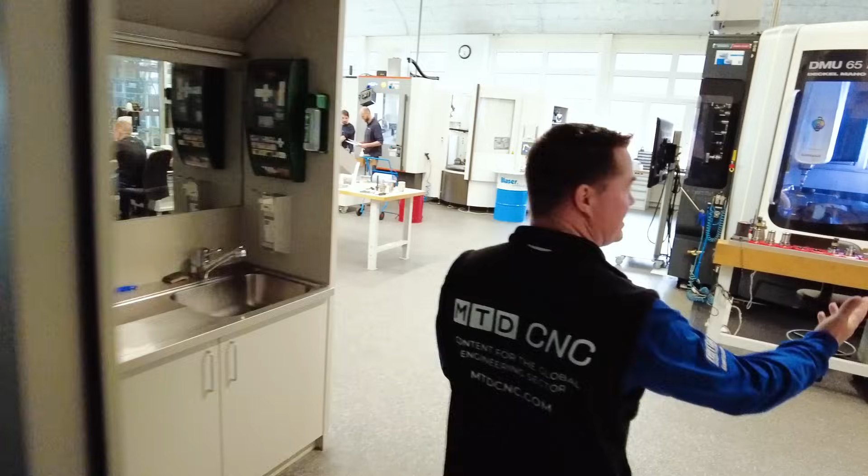And yes, we are here in Switzerland. As I've already mentioned, we see people doing R&D here. Adrian's speaking with one of his colleagues. In fact, this is the social media area.

Adrian, thank you so much for allowing us to have cameras. Nice to have you here. Oh my gosh, this is one of those, I actually literally have chill bumps right now. It's not every day we get to see and show the audience, the world, the inside of something of this magnitude and this significance. As a global leader in coolant, you guys go above and beyond to make sure your customers are taken care of. Absolutely. Thank you for having us here.

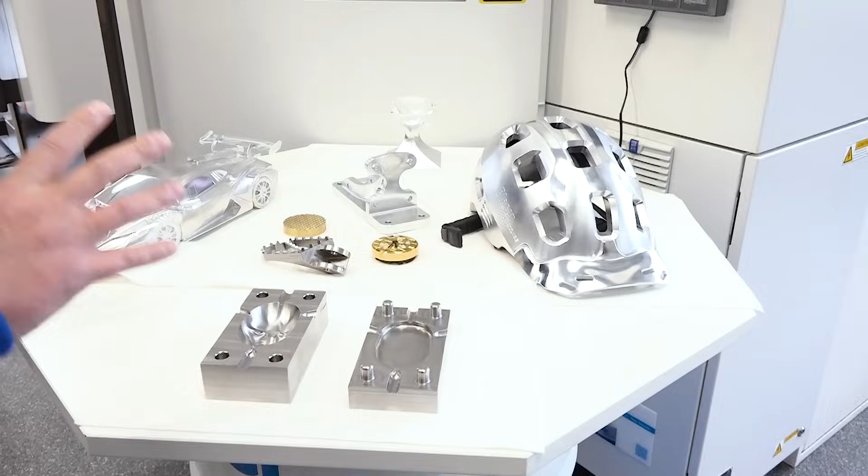Perhaps I can show you some social media parts. Well, the audience and I both love seeing really sexy manufacturing parts, and that is what you have done right here. It's a little heavy on my head, but to be fair, it started out as a really heavy block, didn't it? Absolutely. There are about 30 pounds of aluminum, which our dedicated machinist milled on the machine. So we are happy to have such an experienced guy here in the tech center, and it's always interesting projects to perform here.

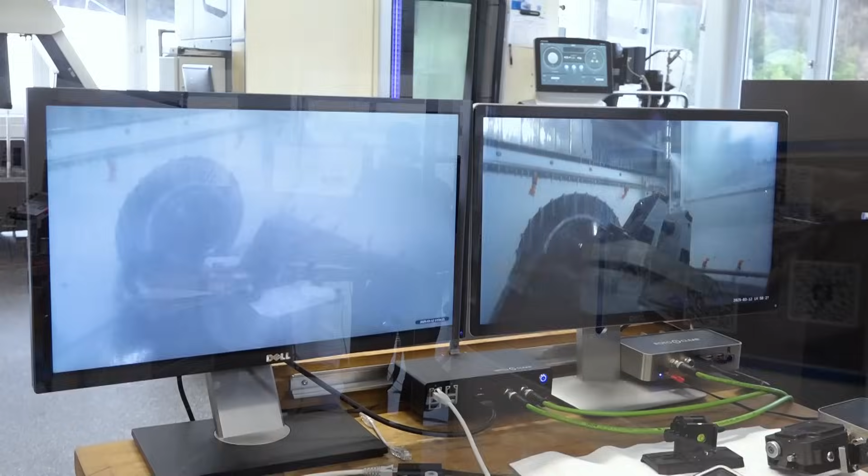Adrian, the world of manufacturing, well, let's just start with the world at first, understands how significant and important marketing is, but the world of manufacturing hasn't 100% caught on to that yet. You guys have. You have a dedicated work cell right here, I see QR codes you can scan immediately. You have a young man that's been doing this a long time, and I even see partners throughout here that believe in manufacturing and marketing as well. What does marketing mean to Blaser?

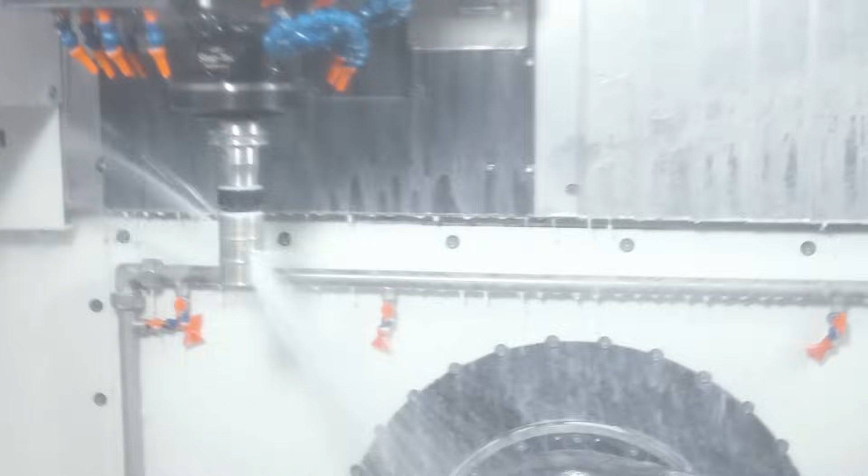I think marketing means to Blaser that we can bring the coolant near to the customers. And it's so important to bring this knowledge to our next generation, because they don't read a lot of papers, they have their phones, they want to see videos. That's the reason Blaser put so much effort into this project.

Well, you're doing an amazing job, and I 100% agree with you. Quality speaks for itself, that's the foundation. Then we've got to get that noise out there, right, and let people know what's going on.

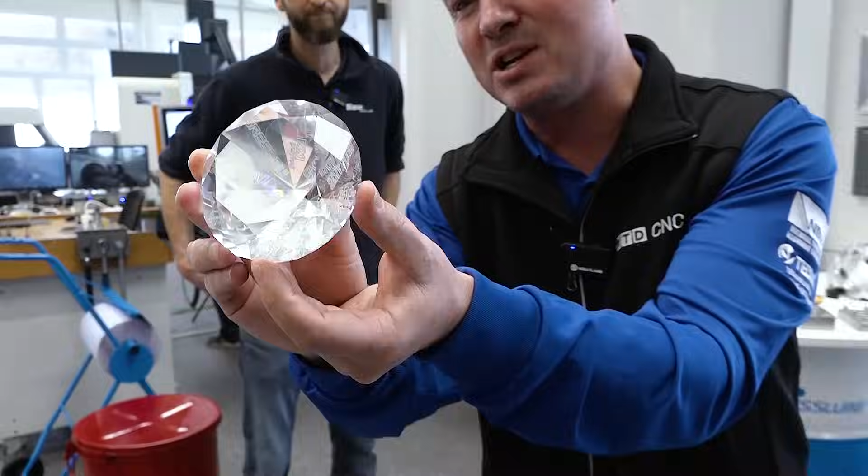As I look around, I see some wonderful machines. I'm looking at this piece, and I'd love for you to describe it in just a minute, because this was actually machined, my friends. I'm going to show you guys a little closer to the camera as well, because this, believe it or not, was machined, and we're going to talk about that. But when I'm looking in here, and I see this power grip behind me, I know that Rego-Fix is one of your partners.

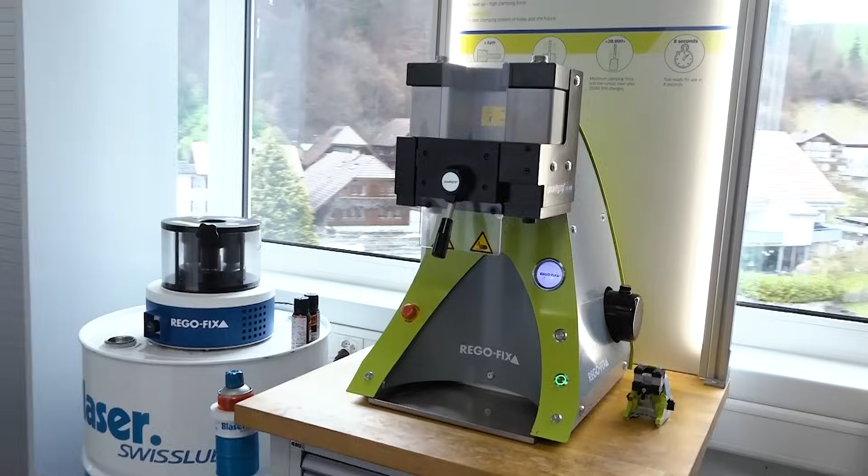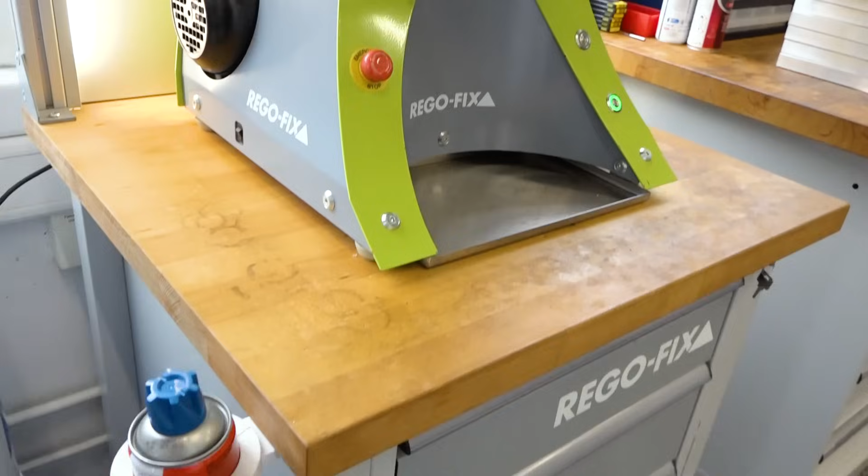What do you think precision means? How important is precision to the overall manufacturing process, but also in the world of coolant? Whether we believe it or not, coolant and precision go hand in hand as well, don't they? Absolutely, it's the basic of all. Precision is precision, and you have to have the right chosen coolant so you can gain the right precision. So we are happy to have Rego-Fix on our side, to work with their clamping system, and our machine loves the whole system. It's easy, it's really stable, and it's the perfect product for us.

If we're running out of alignment, or if we're getting reduced tool life and your coolant is perfect, but your precision is not, you're already having issues. And vice versa, if my precision and everything's lined up as it should be, thanks to Rego-Fix and this powRgrip, on top of that, if my coolant's not good, I'm still burning through cutters.

That's absolutely perfect. You bring it really on the right side. Nothing to mention to this. No, nothing to add? Sometimes I actually know my job.

Can you believe that? All right, let's describe this a little bit before we slide into this whole row of projects and go into the in-depth process of what you guys do here at Blaser to showcase to the world we mean what we say.

We go into this business taking care of our people. We don't just make a product and say, trust us. We're gonna go into the details of that, but this is one of your fascinating social media pieces.

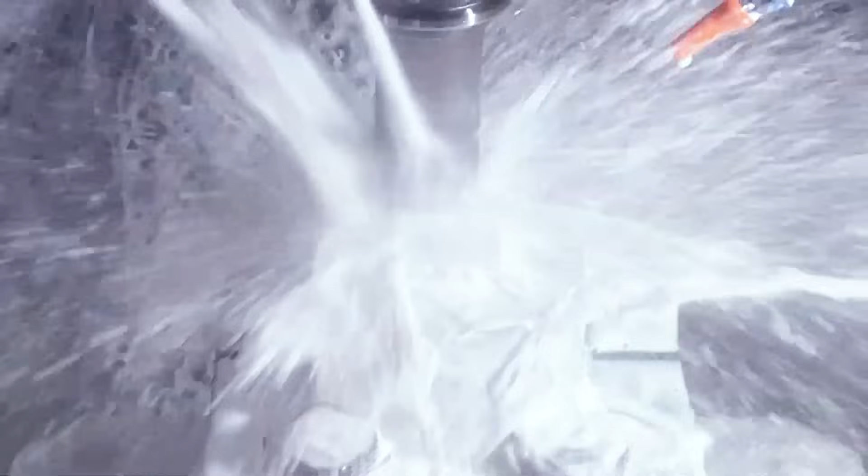How was this made? It's made on this machine. It's acrylic glass, specialized, and you have to mill it with a special tool - it has to be a natural diamond. The guys love to design it, it's designed here at the tech center, and they love to mill it. I think the result speaks for itself.

It absolutely does. Don't tell anyone I put that in my pocket.

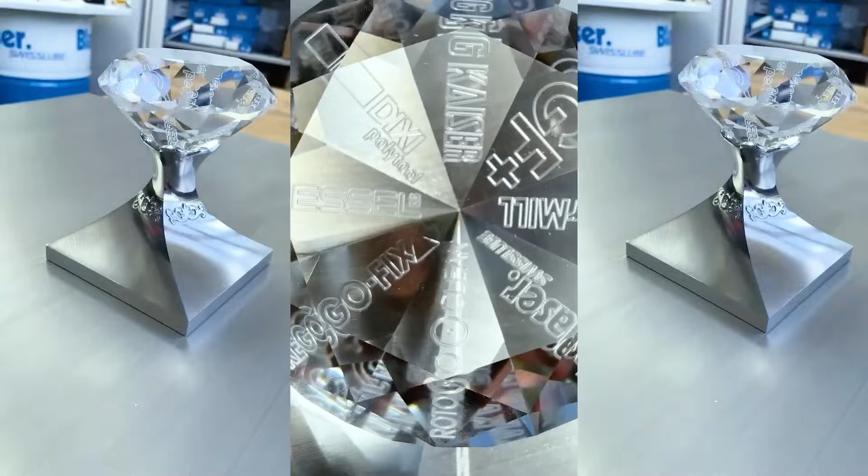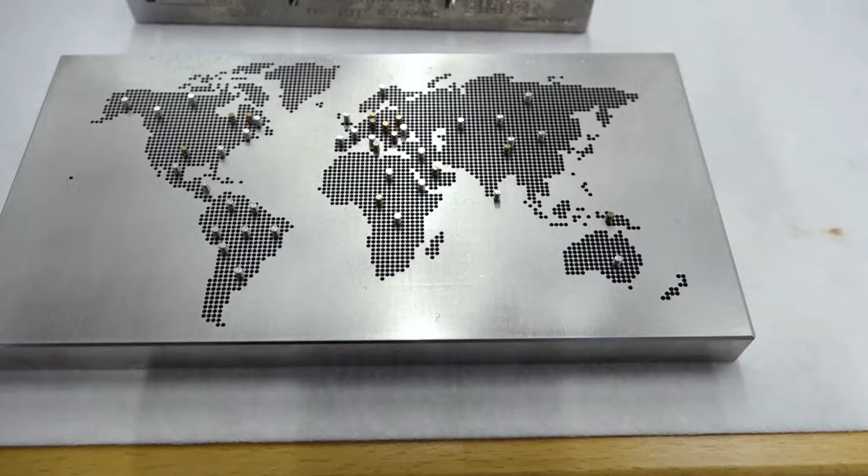All right, we're gonna move over here a little bit, Adrian, because as we take this slow walk and see all of these components, I've had the great pleasure to learn from you and your dedication to making sure - probably even more than you need to, I would say, but you would disagree with me and say no, we need to do all of it. You go into such depths when it comes to testing your products for everyone out there. Would you mind describing the processes you go through?

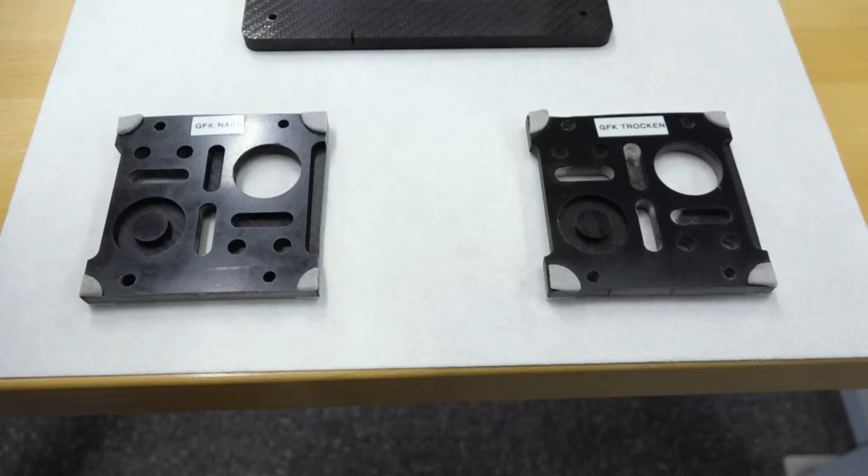Absolutely, we have different processes here. If we test just our coolants to find the right spot from the coolant, then we do our own standard tests. But here, for example, we have an example for a test with a customer where we mill this part. It's for the aerospace industry. And it's important to know that we do not exactly mill the parts which our customers do on their machines, because we do not have exactly the same machines.

But together with the customers and with their engineers, we designed such a part, a demo part, and then we can mill this on our machines. Because we have the capacities here in the tech center, and our customers, they have to produce the whole day. So they come here to us, and we do a good project together.

I'm not going to say the company, but I have utilized your coolant in a previous lifetime of mine to machine this very part in several places around the world, but we won't say any name drops.

All right, as we walk this general direction, I heard a story, and this story matters to me. It was Billy Blaser way back in the day who made a cream for shoes that was actually waterproof, because in this area, in 1936 when this started, it was mostly farmland. And these people wanted waterproof, and he made this cream.

But I want to speak to the audience about this. When he made this cream, he went to the people and said, let me do your shoes, and if it works for you, I'll be back tomorrow and you can pay me, and if not, you got a quality shoe clean out of this. To this day, this mindset of proving that you're going to work is still part of the Blaser Foundation, isn't it?

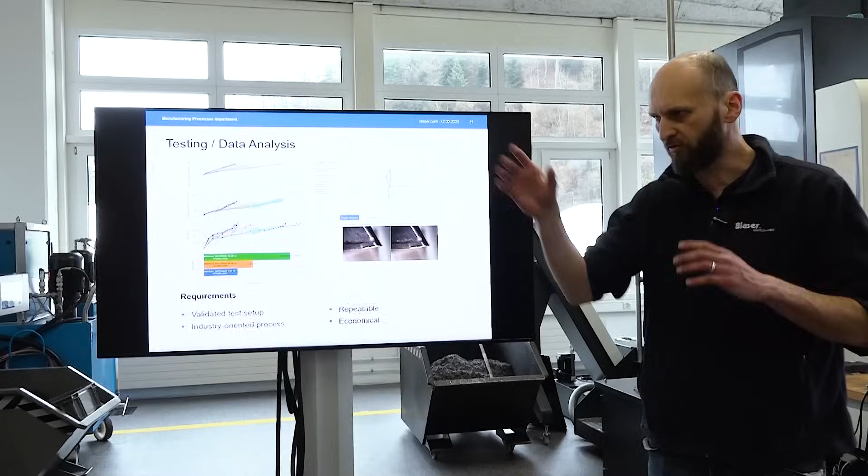Absolutely. It's really the basic. That's the reason we are here so data-driven. Imagine on all these machines, there are so many sensors implemented that we can measure the different parts of the coolants in the process. So at the end, we put this together.

And we want to prove with data to our customers that we are the right partners for them to improve their process, to improve their whole system.

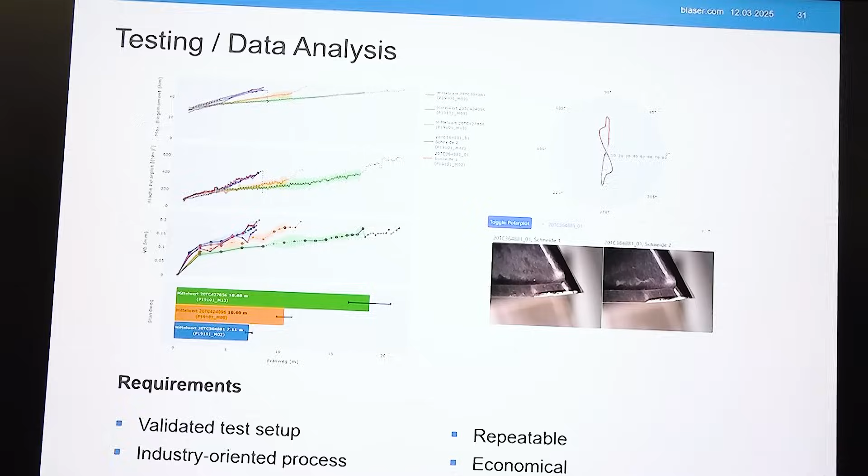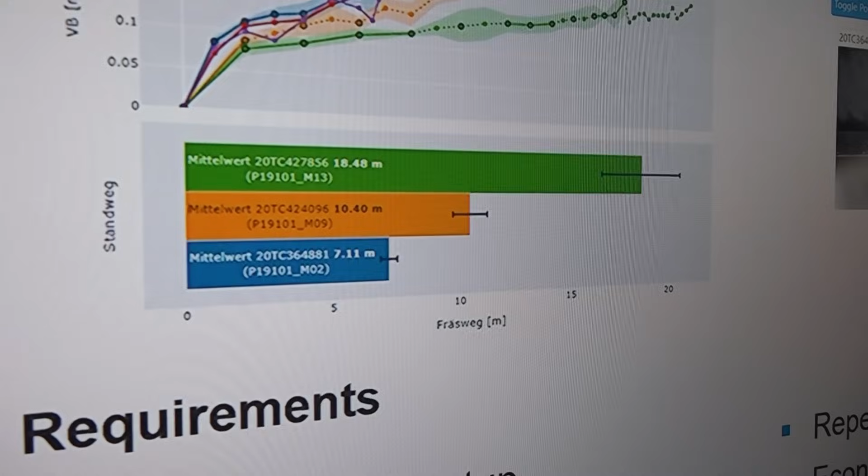Adrian, I'm gonna share a frustration, if it's okay with you. I get frustrated sometimes when I travel around supporting the best, and Blaser is arguably the best on the planet. People say, but Tony, it's more expensive than what I'm using right now, or more expensive than B product out there. I look at it like this, and I see blue, orange, and green. I won't go into details, but at the end of the day, what that means is price per part. I'm saving a ton of money by investing in the correct product that lets me make more.

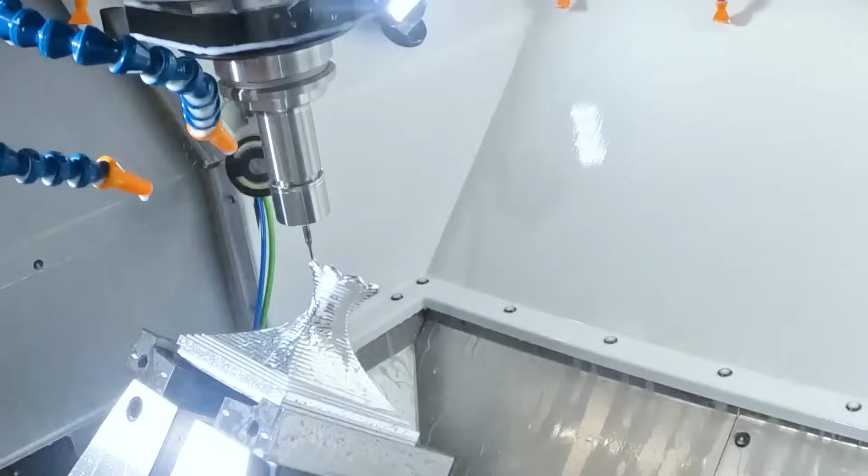That could mean secondary operations, not needing a secondary finish. Maybe it's tool life, maybe machine life, whatever component, maybe it's energy. Energy is so important these days. You guys test all of that, and my frustration is people who give up based on a price point at the beginning, instead of looking at the data you guys have developed for years to make sure these people are taken care of.

Absolutely right. If you take this example here, you can cut your tool cost in half by choosing this coolant. So that's absolutely possible.

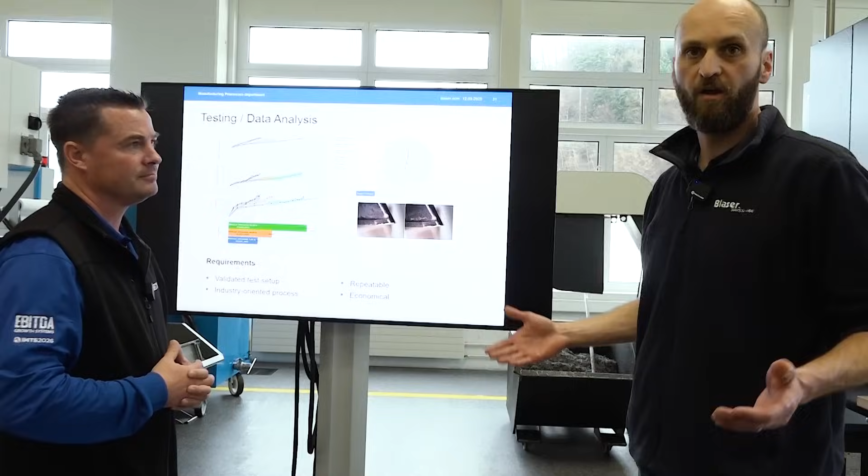And regarding energy consumption, perhaps we have a little example here. Let's take a quick look at this.

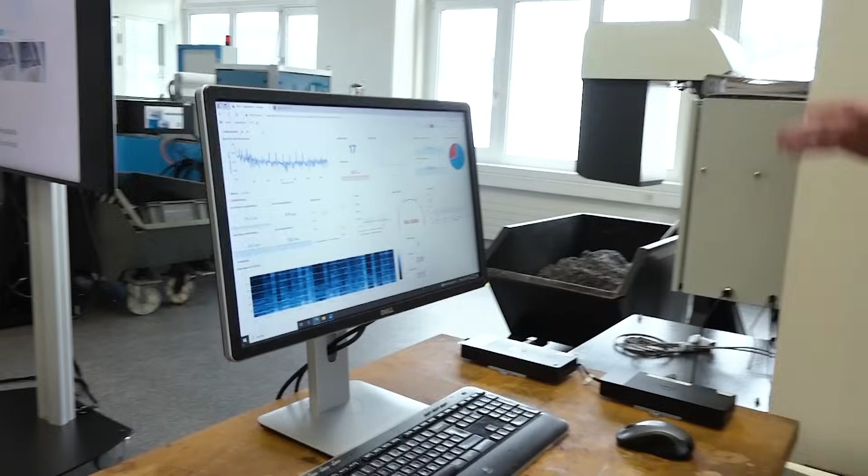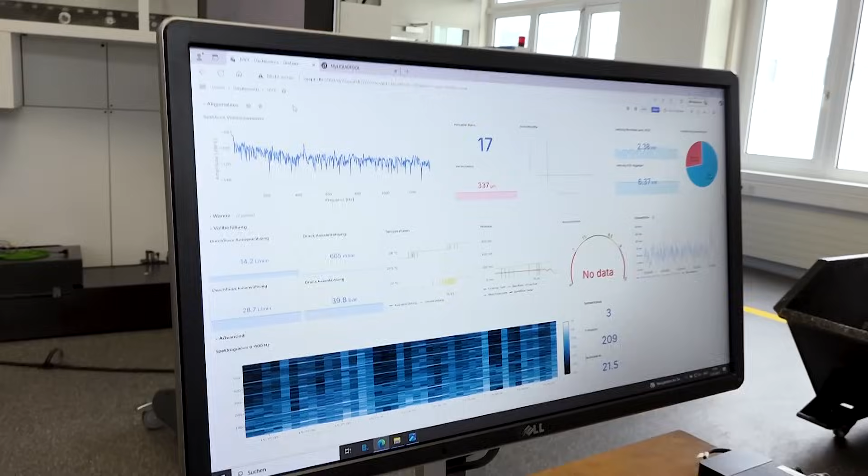Invite everyone over. On these machines, there are 12 sensors, and for example we also measure energy consumption, because we all know the pump system and the other systems on the machine need a lot of power. But with the right coolant, we try to find out if we're able to reduce the power consumption on the machine, so our customers can save money. That's our goal here with this machine.

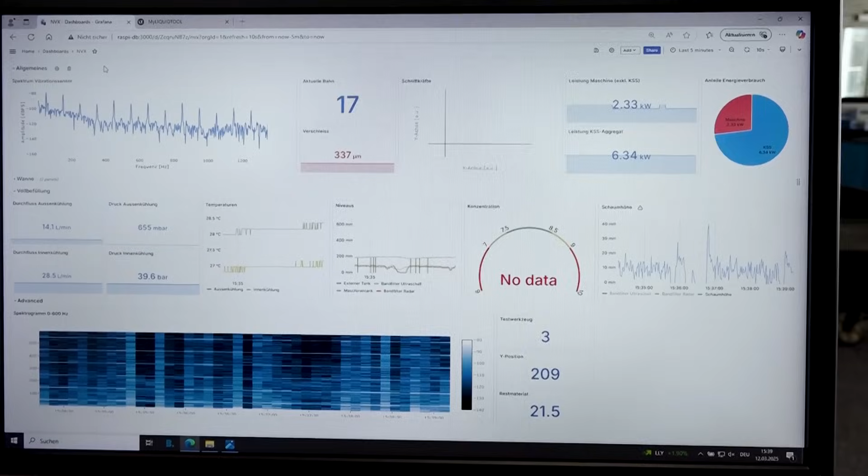One of the projects we do here in the tech center. Adrian, I know we could talk for the next 3.5 days about all the areas where people can save money, but I'll just stick to the energy consumption point. Second after second, minute after minute, hour after hour, day after day, year after year, the strain on the pump itself, being able to reduce it by a few bars and get the same or better results based on that energy consumption, to me, is common sense.

And if you're testing that for me, and I don't have to do that same thing for the next 5 years to find out if you're right, that's a win instantly. That's what your R&D center is all about, creating wins for people without them having to do it themselves for the next 10 years.

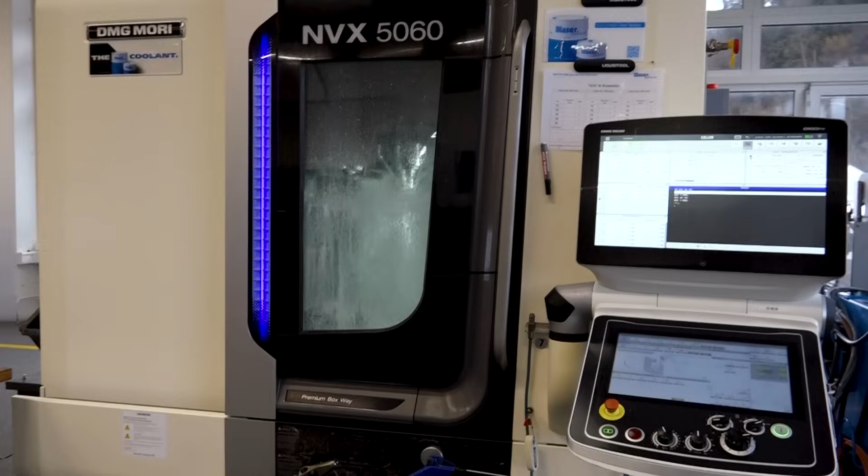Absolutely, and that's the reason we are here, and we love working here. For me as a machinist, as a technical guy, it's wonderful to be here finding solutions for our customers. That's important, the customer is in the center, and that's why we are here, why Blaser invests so much money and effort in this whole tech center.

Well, Adrian, I know we started with a big sign out there that said no cameras. And when I asked you if you could film, you said very quickly, before my boss finds that out. We didn't actually get permission today. We're doing this without permission, my friends.